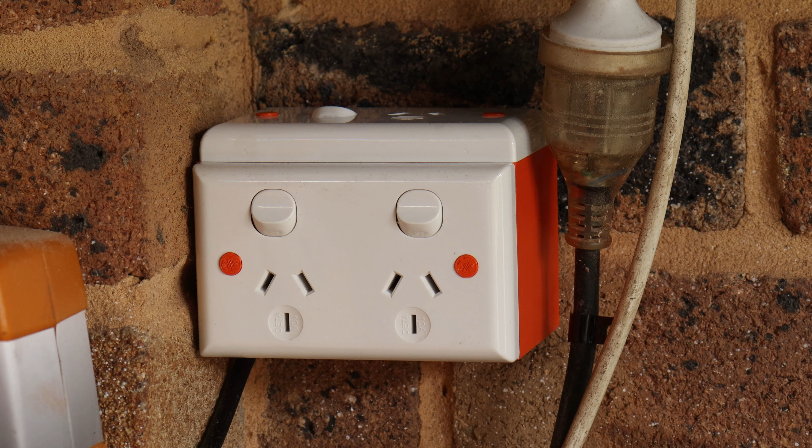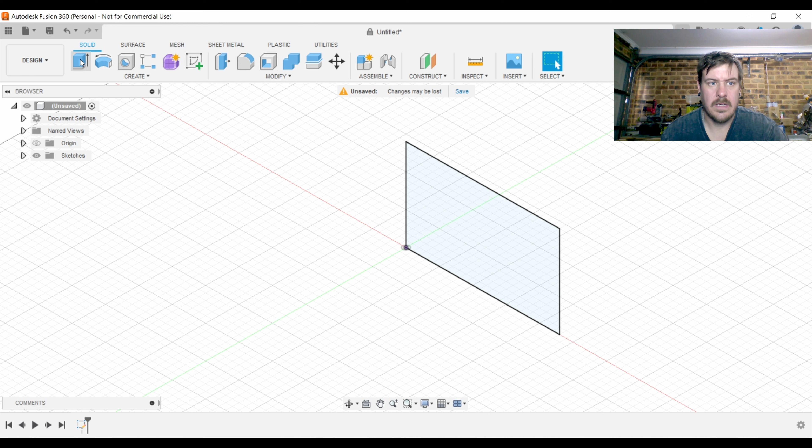All right, so now we're in Fusion 360. We pretty much just need to make a simple box. So we're gonna come down and we're gonna make a sketch on the bottom here. And I know that the power point is 115 long by 70 wide, or 70 tall by 115 long. And then we're just going to extrude that out 70 mil.

Now what we're going to do is we're going to shell the top and we'll come in 2 millimeters, and then we can start on the design of what we actually want. So we're going to make a new sketch on the front here, and then what we need to do is pretty much map out what we need the opening to be for the power point.

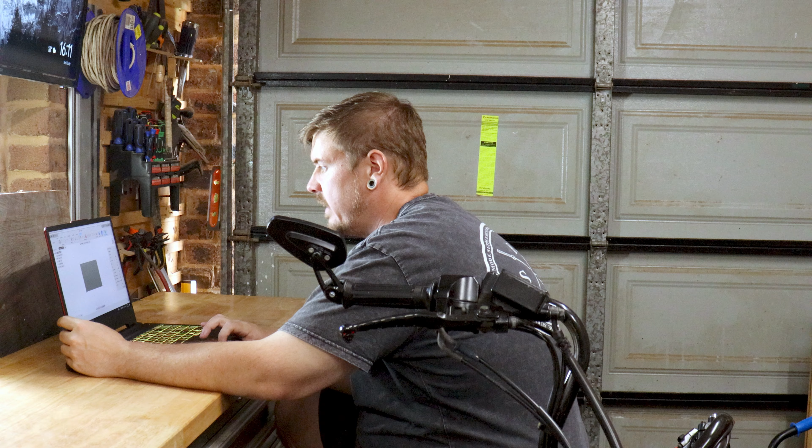What I do know is that I want to have a 5 millimeter border all the way around. So we're going to go 5 by 5 and hit enter, and then we can come over here, turn off our construction line, and then we're just going to go 105 by 60.

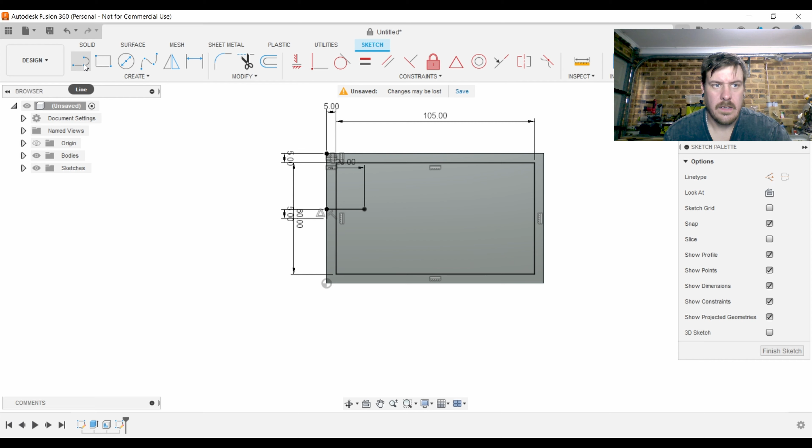And now that we have that, we need to map out what we need for the actual power point mounting. So essentially all I need to do is come up to the middle here, and we're going to come up 5 millimeters, and then we're going to come across 20 millimeters, and then we're going to come down 10 millimeters, and then we want to draw a 45-degree line down this way, or 135, because that's the opposite of 45.

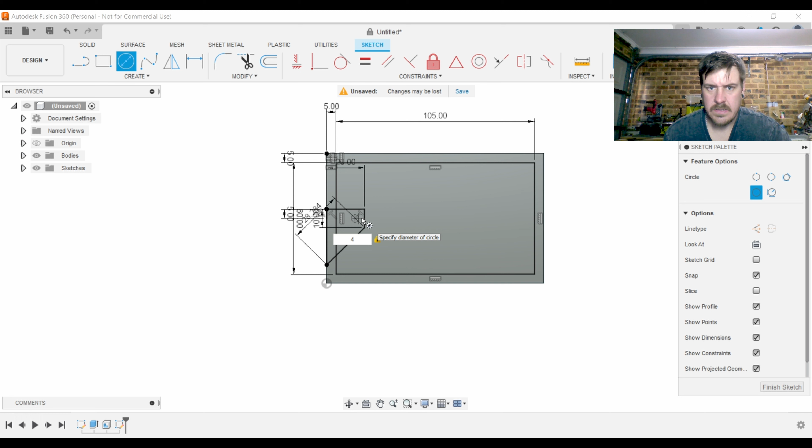And finish that sketch there. And then one more line to finish that off, bring it up to the top. Now we want to make a circle in the middle here, and we need this to be 4 millimeters, because that's the hole that we need to put the screw in.

So we're going to make a construction line in the middle here, coming down the center. And now we can go mirror, select all of these lines here, and then our mirror line will be this construction line. Oh, and we also need to select the circle. So now we can finish that sketch.

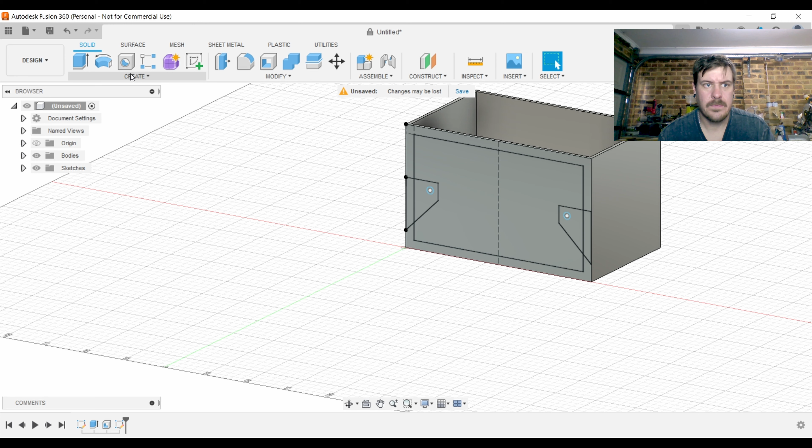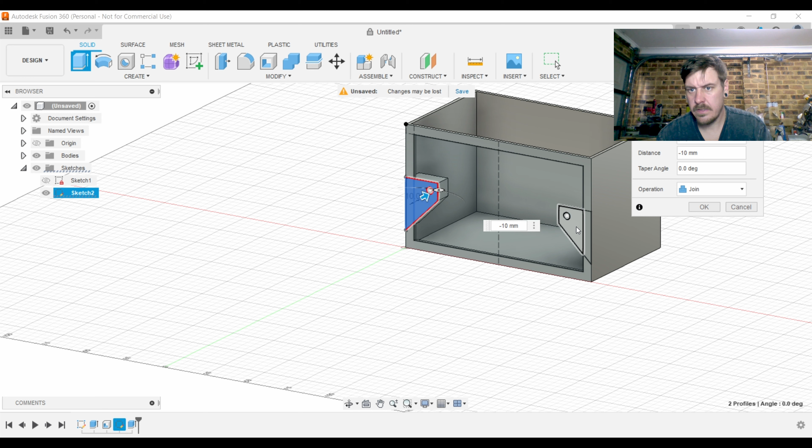And what we're going to do is this center part here, we'll just go -2, that'll cut it away. And we're going to bring these 2 parts, we're going to go minus, let's go 10 mil. And then we want to change that to join, and we want to select these 2 parts as well and hit OK.

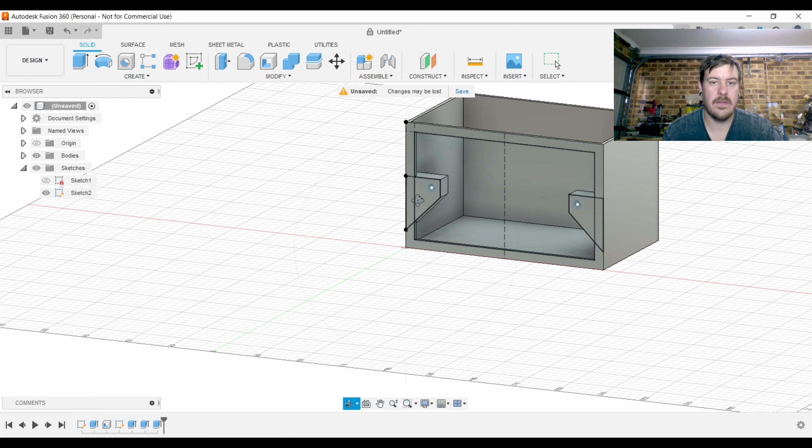The last thing we need to do is select these 2 circles and extrude them back to cut out the holes. And the reason why we have made it the way we have is that if you print at a 45-degree angle, you don't need supports when you 3D print. So the whole reason why we've made it the way we have with these angles here is so that we don't need supports.

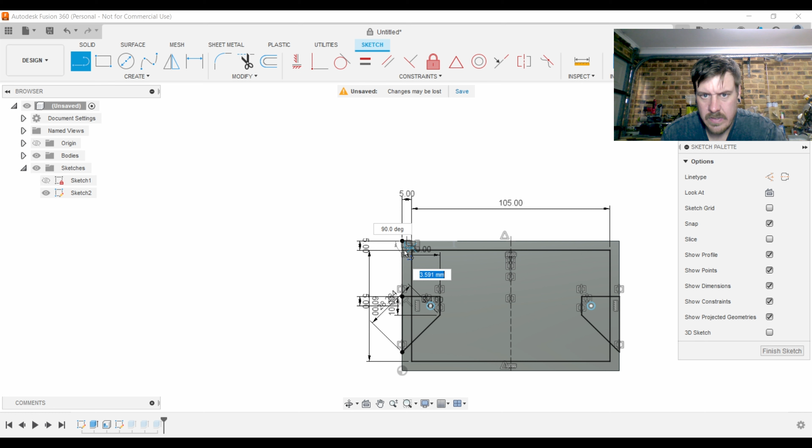We are going to need a 2 millimeter thick support just on this front plate here, just for this top rim. So now we want to edit this sketch again real quick, and we'll make a line that comes across 5 millimeters, another line that comes down at an angle in this corner, and another line up to finish that triangle.

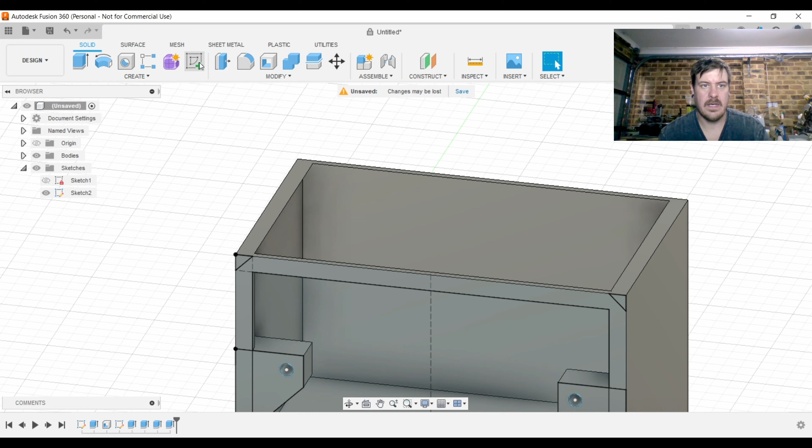Then we can mirror that one as well, and we want to extrude these 2 by -70 and join. Essentially that's going to give us this same lip here, but at a 45-degree angle. We don't need supports for the top part because we want the top open to accept the other PowerPoint. Then we want to make another quick sketch on this face here to replicate the same thing.

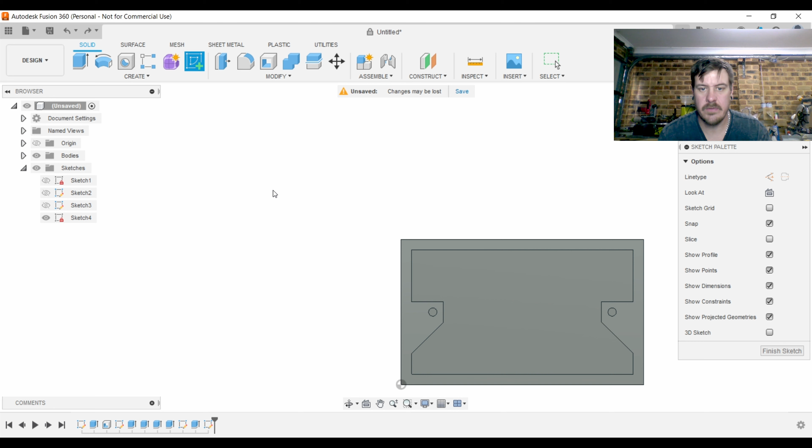Now that we've gotten this far, we need to make the brackets for the top PowerPoint. We're going to create a new sketch because it'll clear up all the lines from the original sketch that was on the front here. And from the top here, we're going to pretty much repeat what we've done down the bottom there.

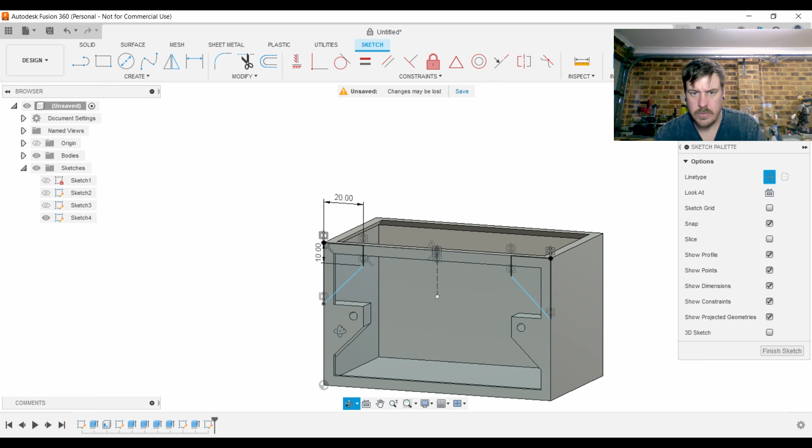Okay, now we want to extrude those two by 10 millimeters, making sure we select the whole lot and make sure we go new body. So now we're going to select those two bodies and just move them back 30 mil, which puts them in the center, and then we can click OK.

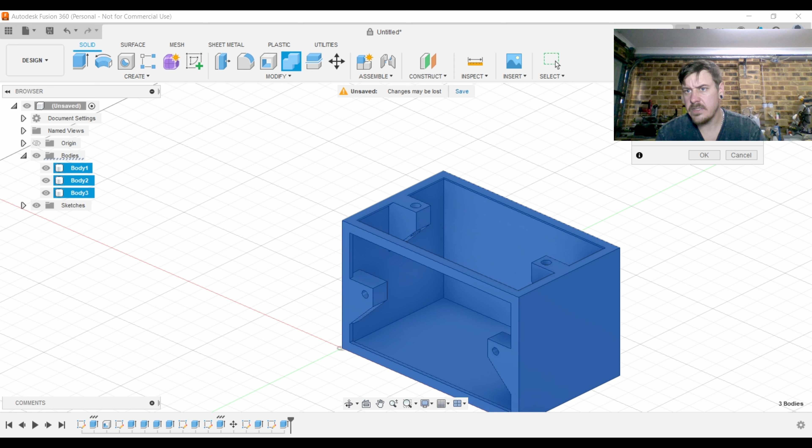The last thing we need to do now is make a new sketch on top and create a hole in the center here. Now we're just going to select all three bodies and click the combine tool. Tool bodies, operation, we want to make sure we join them all, click OK, and now we have one body, and that is our piece done.

We can now send this off to the 3D printer in Cura and make sure we alter our supports so that it's only doing the front face.

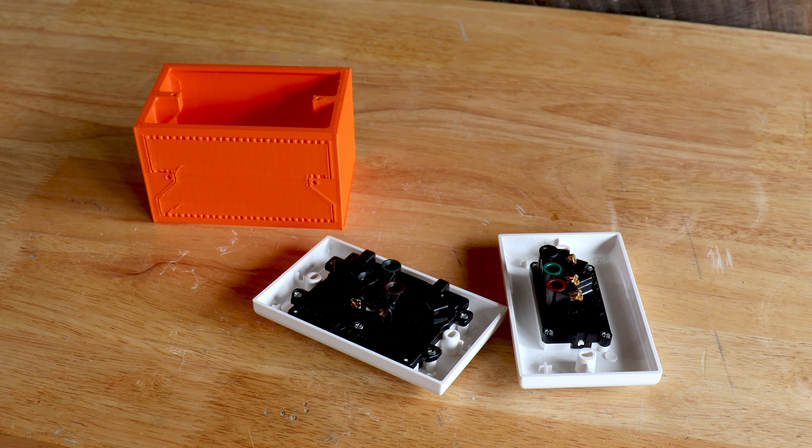All right, we now have our 3D printed box, our PowerPoint, and I also got an extension cord from the shop. So all we're going to do now is cut off this end.

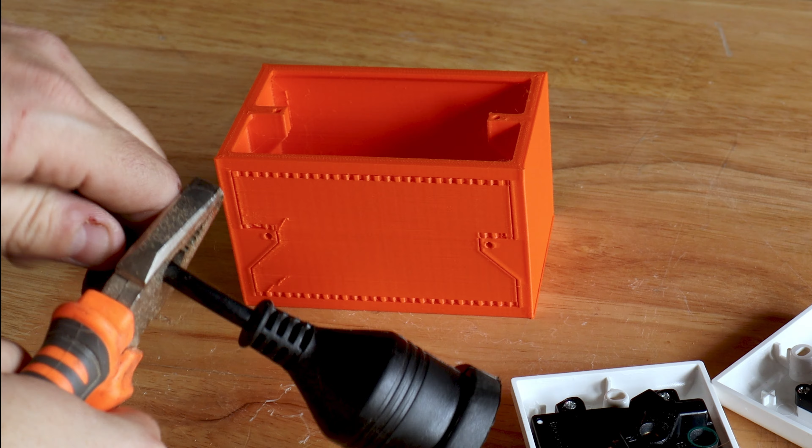Then we're going to strip this wire just like that. Now we're going to feed the wires. Let's take out this support, we don't need that. Feed the wires through the hole we've made in the bottom, and what we're going to do is get our strippers. We want to strip the cabling about here, then pull that back.

All right, and then we can take our wires here, bend them in half, and wire up one of the switches. So we'll wire up the top one.

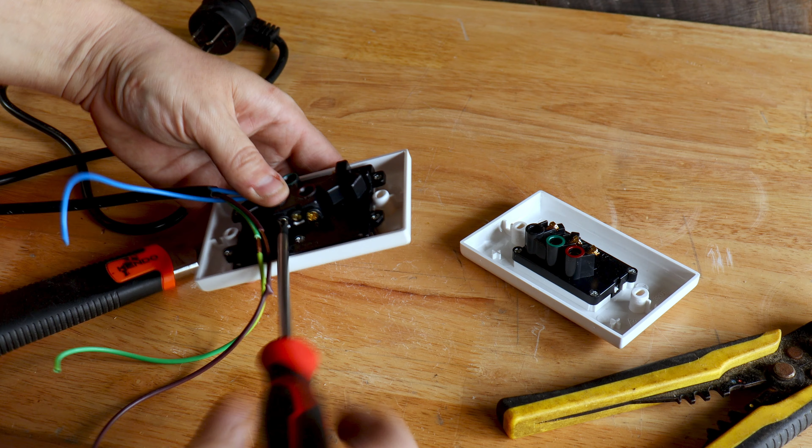All right, now we've got that one wired up. We want to strip the ends of this one, and then we can wire that one onto the end of there and screw it all together.